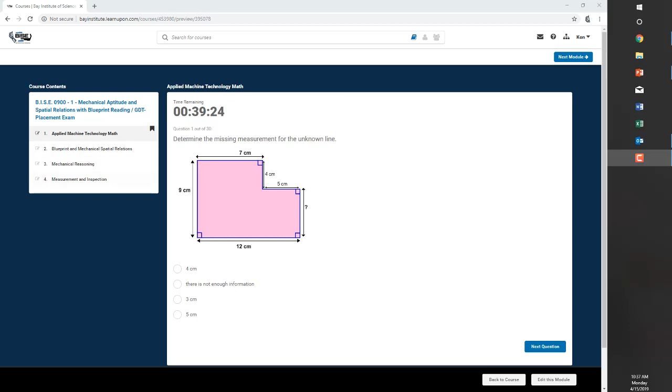It is a 4-part series test: applied machine technology math, blueprint and mechanical spatial relations, mechanical reasoning, and measurement and inspection. The total test for all 4 of these subjects is about an hour and 20 minutes.

Another question that we have in the applied machine technology math is one like this. Again, it's a print that they might see in the shop. We want everything to be related to an actual shop experience.

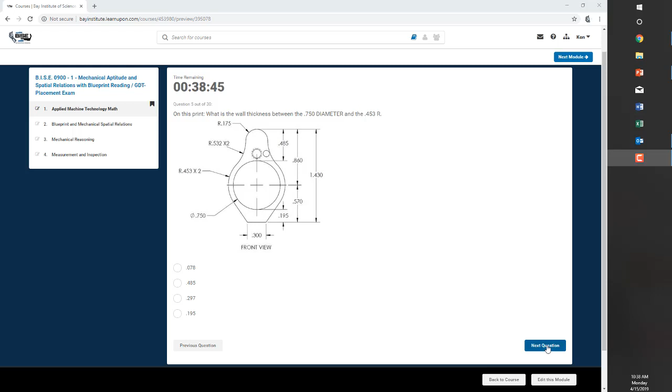So they need to determine what the size would be. They then move on to the next question, and each one might be similar. If there is a formula that's required, we place the formula on there, and then they have to solve from there. This gives them an idea of what they would run into in a shop, just a quick view of the different types of questions we would have in that topic.

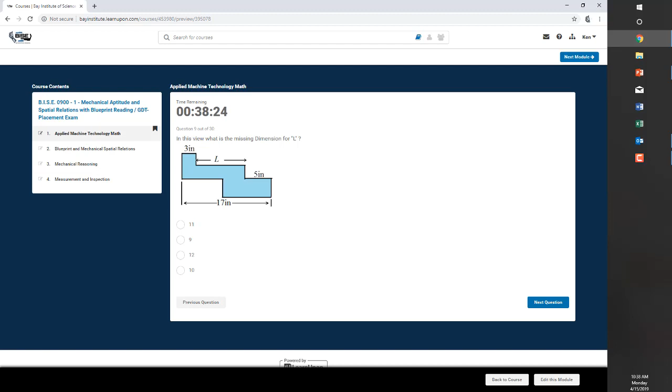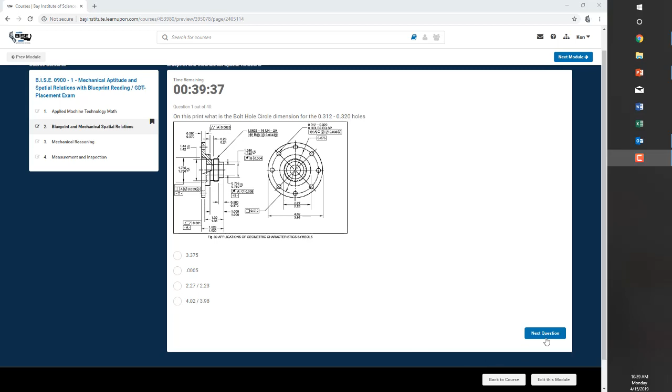Let's jump over to mechanical spatial relations. Here, this is again a print, but in this case, it shows what bolt hole circle dimensions are there for the 312 to the 320 holes, and they would need to know that. Let's move through and take a look at some of the others.

Again, same concept, same idea. The students move through these. Each one of the questions are there, and they need to determine the answer for these. So let's take a quick look at some of the questions. Here's a block; they would need to determine which one of these figures would be related to this.

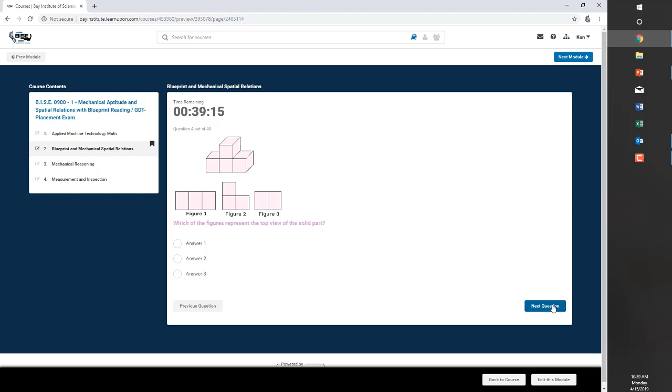Gives you an idea of the different questions that we have. Here you have another block, and how that block would look if it's turned. Again, if you have a solid block, and what it would look like if it was flat.

Again, a print and the questions related to those prints. Another print and the questions related to that print. In the mechanical spatial relations, we also have the different views that they would have to identify and how they are related to the print part itself.

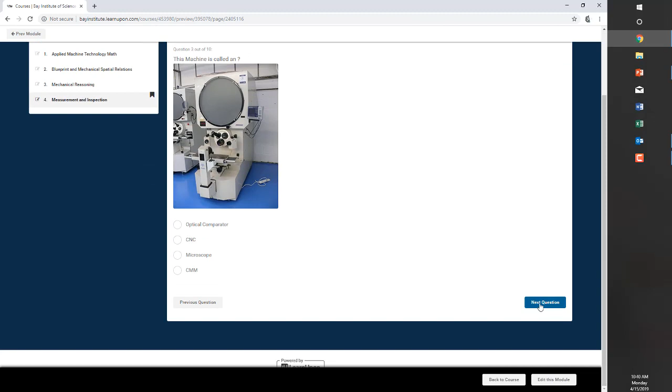In the inspection section, we have the micrometer readings. We would need them to understand how to read the micrometer. There are several different micrometer readings they're going to see, the different types of measuring tools that we would have. Again, another micrometer reading, and I'm just moving through these relatively quickly, but you can see each one has a different micrometer reading that would be required for them to know.

This is selecting tools for a different type of measurement and so on. There is another micrometer reading, and that would be that test.

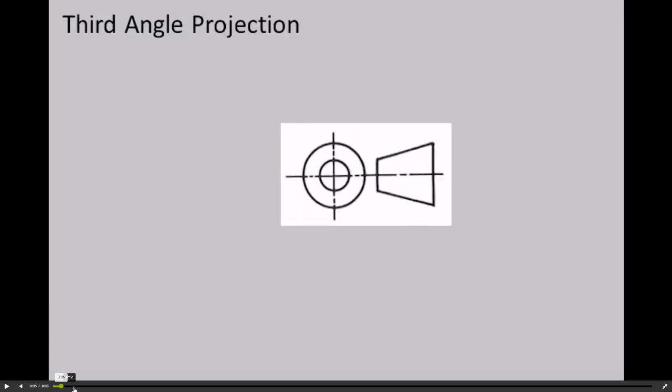In the blueprint reading class, we have the prints that are in the book itself, and the students go through and we give them a lesson, then we move into the actual part that they would see and how they build that part from a print. So we go through it step by step with them.

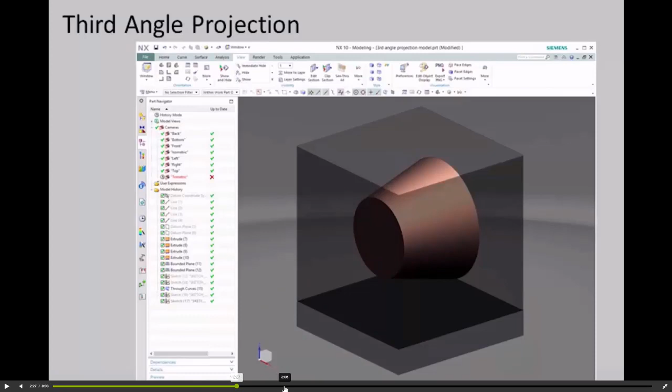We try to help them understand the views that they would see, and this is just one of the videos we would have for the learning experience. This is how they would view this from the front view and how it would be viewed from the side and so on. I'm just moving through this, showing you what the students would actually see.

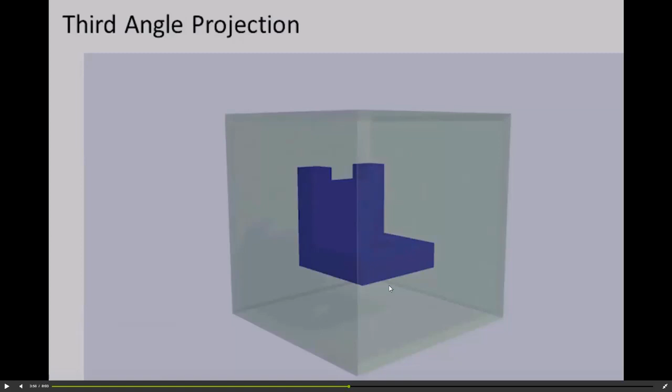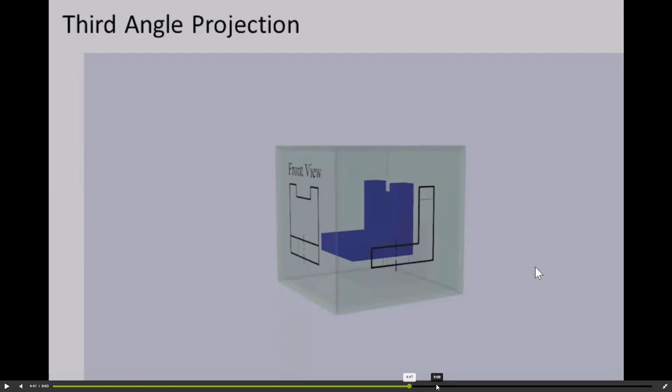And then we would have something like this, so you would see the front view, the side view, and the top view. We go through each one of these, and eventually, as this is projected out, it will open up. You see the view inside there, and this opens up into what you would actually see as the view when it is translated or shifted onto the print itself.

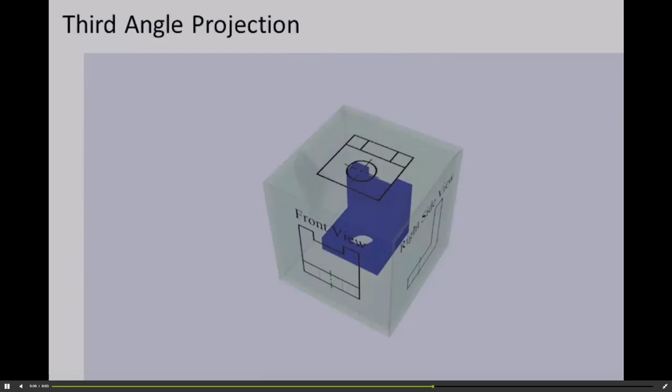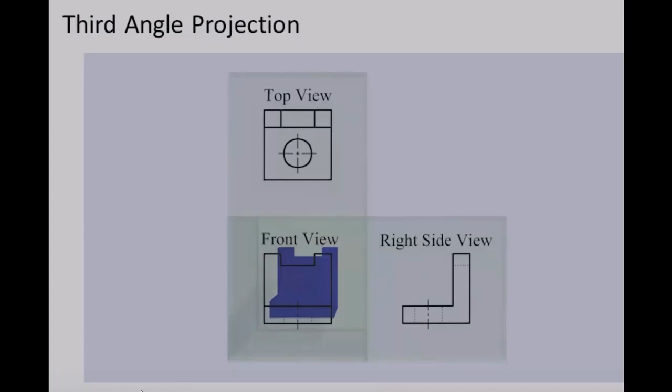And there you have that view as it's shown on the print, projected from a part. We go through each one of the different lines and the line types that they would have as they see that.

In the applied math, we start out with the very, very basics, and then we go into the different concepts as we go through trig, geometry, and so on.

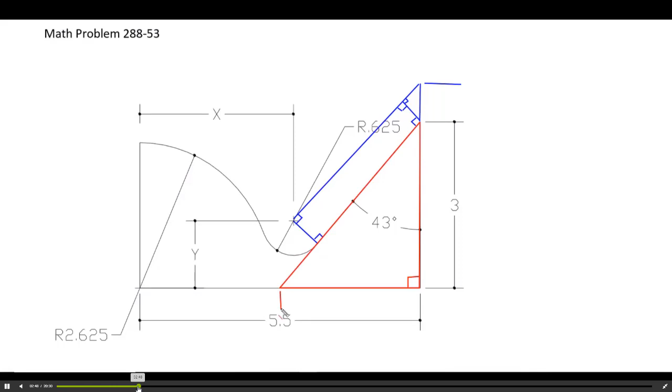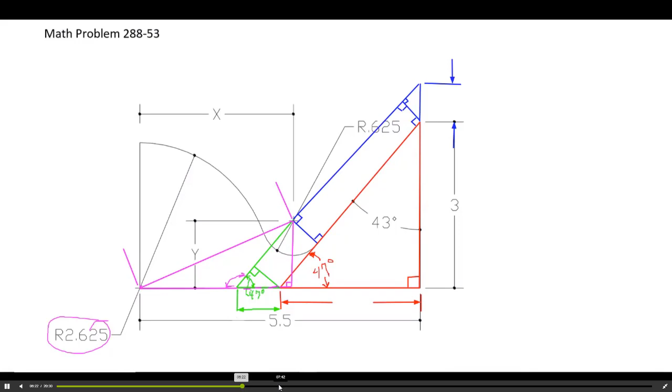Each one of the prints that we use are color-coded with the figures that the students would come up with. We show them how they develop the triangles, and each one of these are in color. So the numbers, as we start to develop them, you will see are going to coincide with the angles that are projected inside there as well.

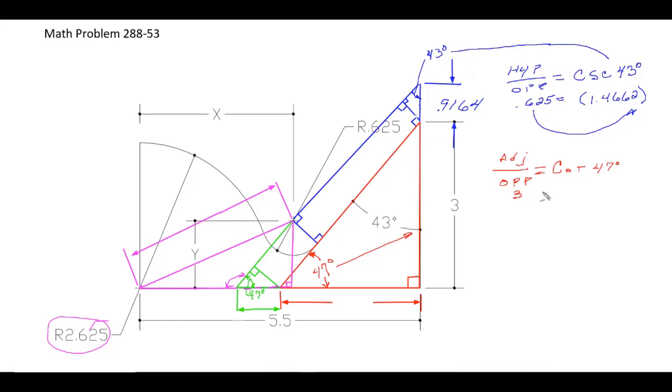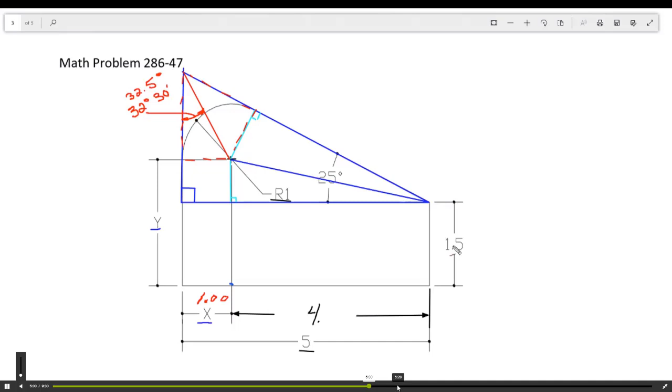This is just another shop math problem, taken directly from their textbook, and the students go through and work out the problem with the instructor. Each one of these angles are found as we take them through step by step, and the formulas are color coded as well. So you can see as we develop this out and the angles that are developed, the colors or the numbers are going to coincide with the angles themselves.

So let's see what those numbers look like. You can see here we've got a height here, and here's the number that goes with that. Then we show them how to work that out as they go through it.

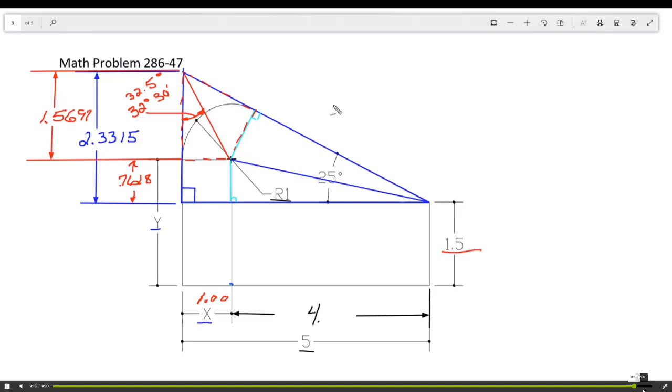We will actually show the numbers and the figures as it develops. Here you can see how the numbers sequence out with the angle that's in there and how they actually come up with the solution for each one of the different angles that are in there as well.

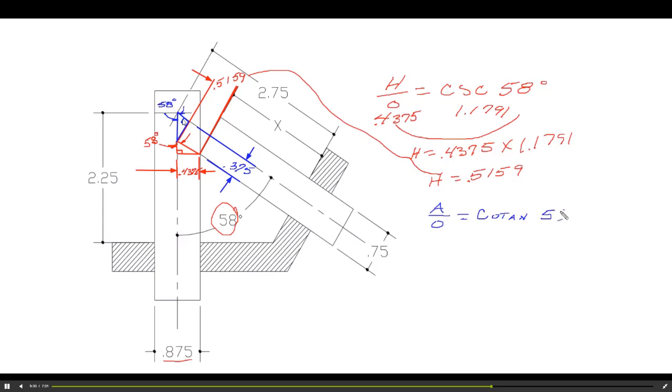As you can see, this is how they solve for this angle inside here. It is color coded.

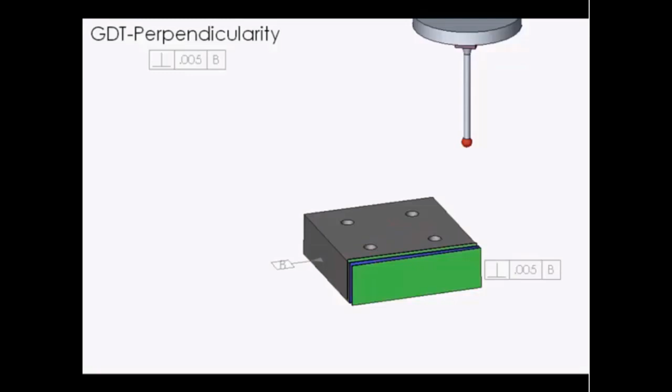With the GD&T, we actually take them through each one of these. We teach them perpendicularity, angularity, every one of the features that's required. We teach them all about feature control frames, how the part's inspected, how the parts fit, and why we use GD&T for fits as well as for the actual intent and purpose of each one of the features that are there and that are used.

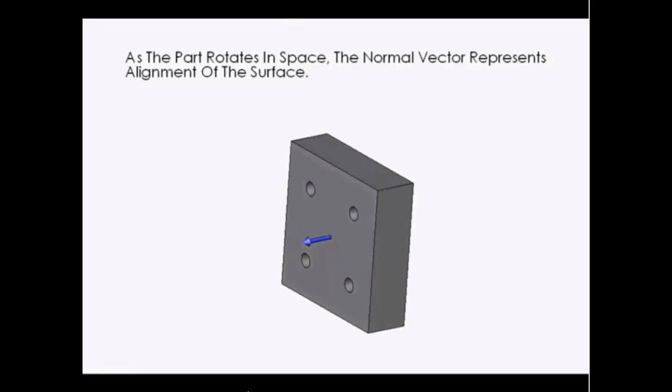So as you go through this, you can see how we develop these courses, how this is used, and the applications that we use within that. This gives them a full understanding of why GD&T quality control is so important and how the piece parts have to fit together with each other, and the concept behind each one of the different feature control frames that they have and why they're so relevant to the working of that part.

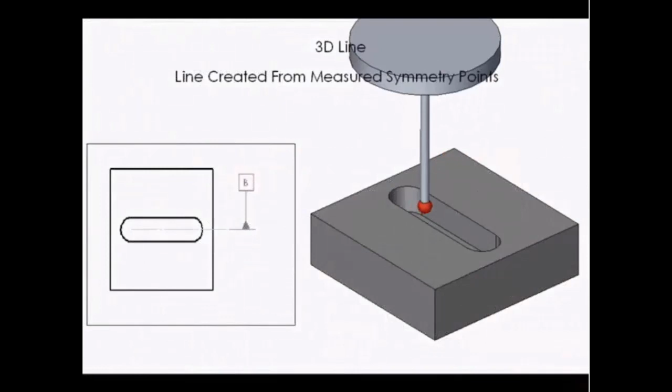Here we show a part, and the reason for what we're creating for this instance is symmetry, and how that part is inspected as well. This gives the students the idea on that, and the concept behind each one of the different feature control frames that we use.

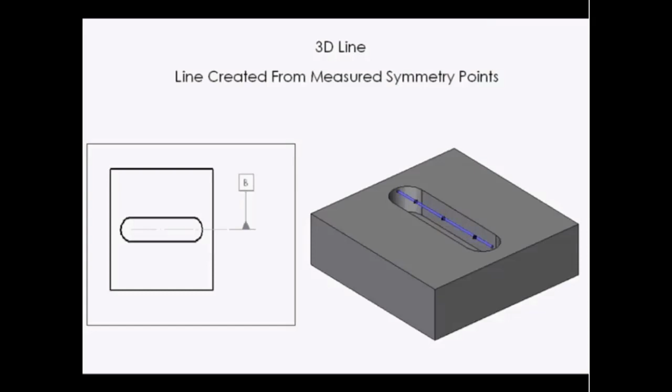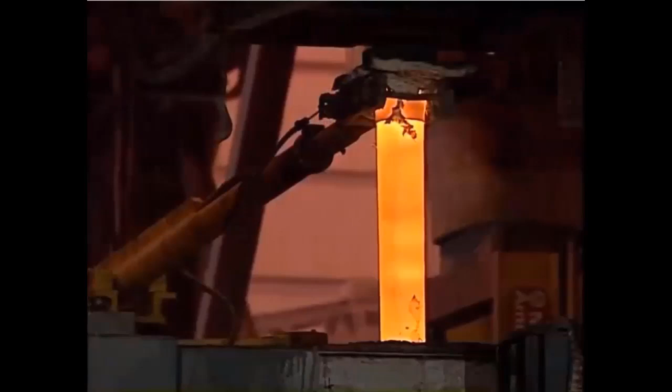In the metallurgy course, we talk to the students about the different types of metals that we have, the purpose of alloying the different types of steels, and what the advantage is of alloying them. We cover the properties within those alloys that make one type of steel more applicable than another for the different processes and procedures they would be using the steels for.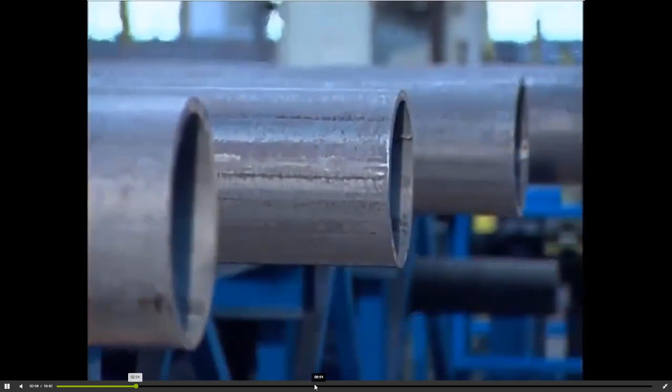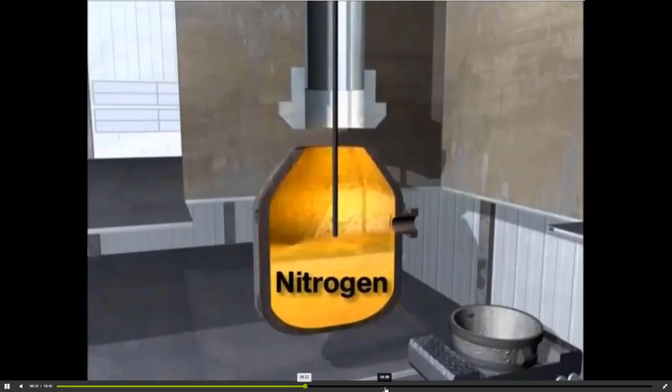So as they go through it, they get a full idea and concept of the different types of processes used to make the steel, as well as the alloying agents that are in the steel itself and the properties that go with them.

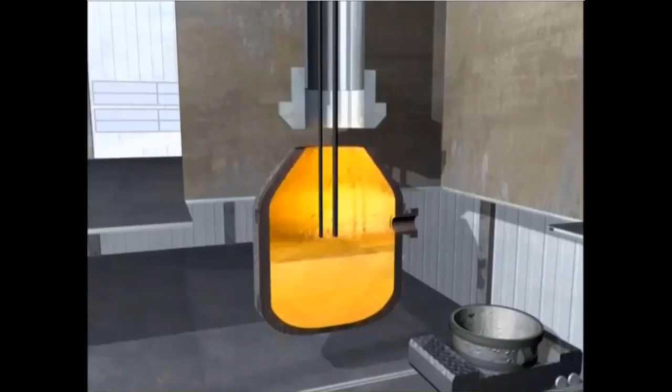So that basically does it for the courses. Of course, there's die making, mold making, quality control, as well as the other series of courses that I showed you. I hope this gives you a brief and clear view of the type of coursework and how we teach the students the different courses.

It is a total of 600 hours of technical related studies that these students would have to have. That is a Federal Bureau of Apprenticeship and Training guideline that's required.